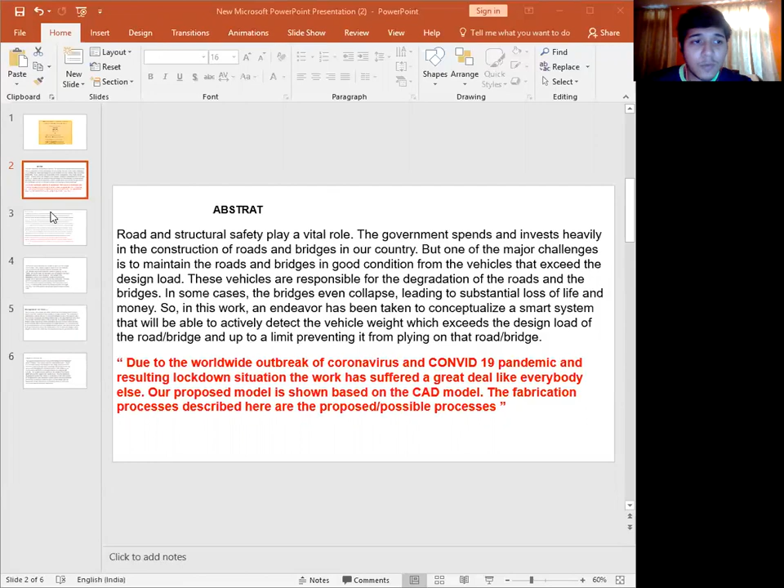Now moving on to the introduction. Due to the adverse effects of overweight vehicles, frequent measures are taken by the government for repairing structural components, requiring heavy investment. In some severe cases, bridges even collapse, leading to substantial loss of life and money, as well as paralyzing commute between connecting places.

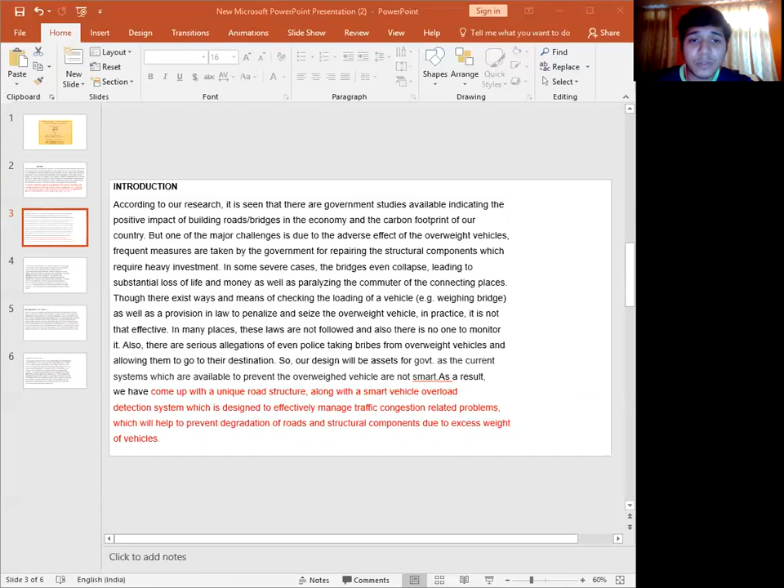Though there exist ways, means, and laws for checking vehicle loading, they are not that effective. Our design will be an asset for the government, as current systems to prevent overweight vehicles are not smart. So we have come up with a unique road structure along with a smart vehicle overload detection system, designed to effectively manage traffic congestion related problems and help prevent degradation of road structure components due to excess vehicle weight.

Now, moving to the motivation of the project. Our project will be government-based, as it is a capital intensive project that will act as an asset to the government to reduce the maintenance cost of roads and bridges. It will also give value to the smart city concept proposed by the government of India. Reducing maintenance costs through modern techniques is one way to save the economy.

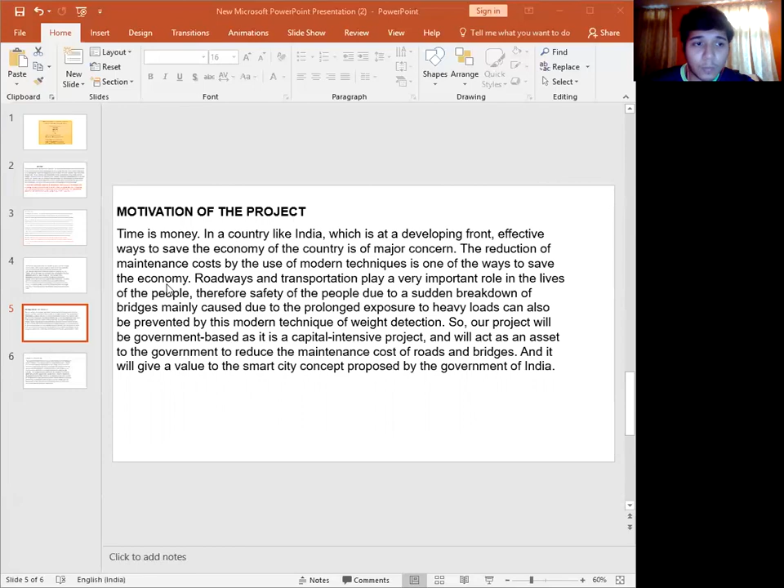Now here is the project overview. Our system will detect overweight vehicles using weight sensors. The weight sensors detect the vehicle's weight and send the signal to the Raspberry Pi. The Raspberry Pi then checks whether the vehicle is overloaded or not. If overloaded, the auto barricade system will be activated, preventing the overload vehicle from passing over the bridge. Our smart road design will help the overload vehicle easily turn and return without causing traffic congestion. Thank you.

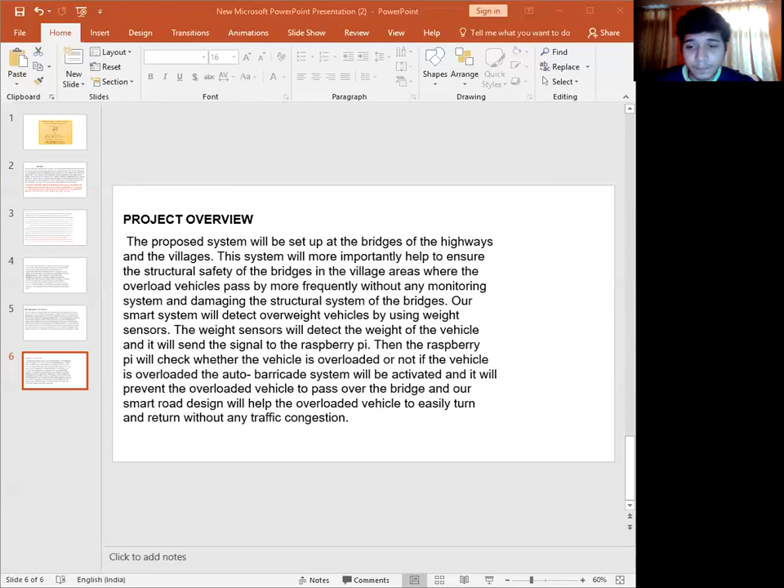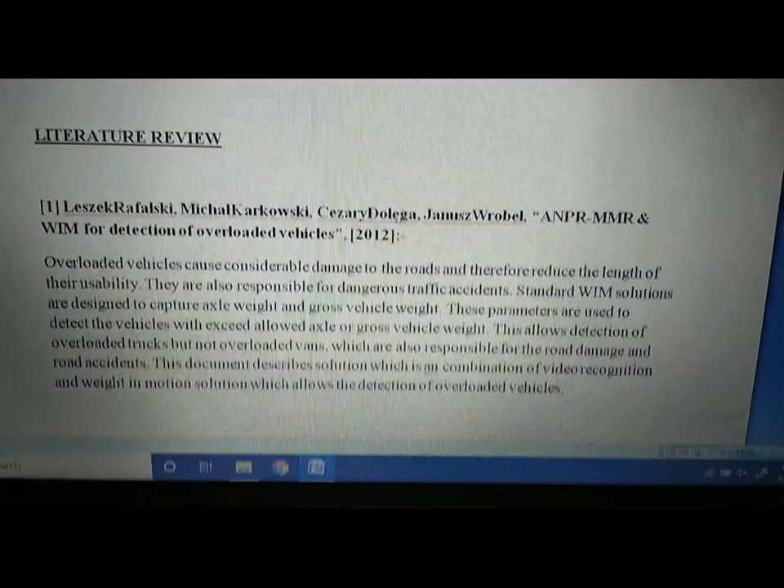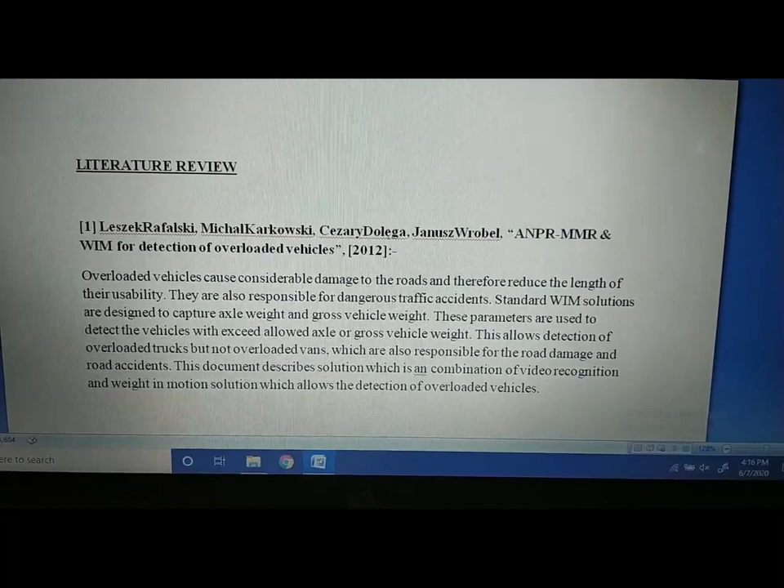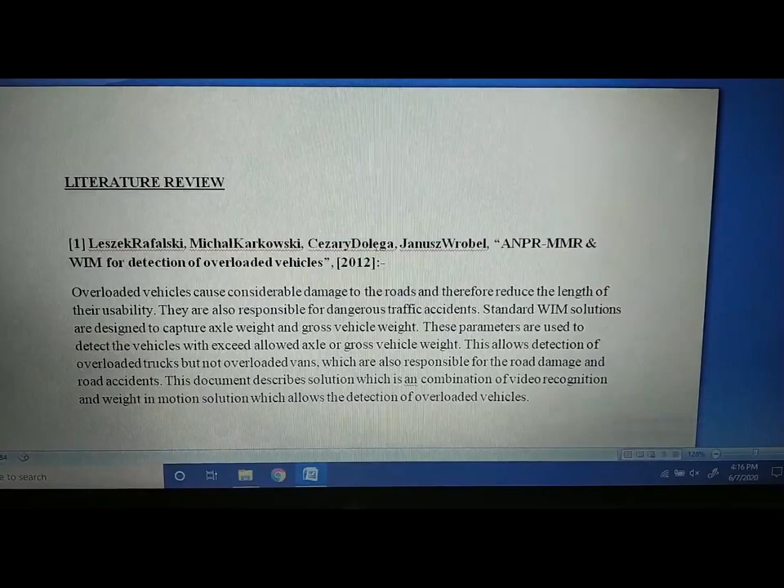For this project we have gone through lots of literature papers. I am going to explain some of the most important ones from which we got the concept of our project. The first one is on WIM (Weigh-In-Motion) for the detection of overweighted vehicles. This allows detection of overweighted trucks but not vans, which are also responsible for road damage and road accidents. This document describes a solution combining video recognition with weigh-in-motion, which allows detection of overweighted vehicles. So, we got the idea of how to detect overweighted vehicles from this paper.

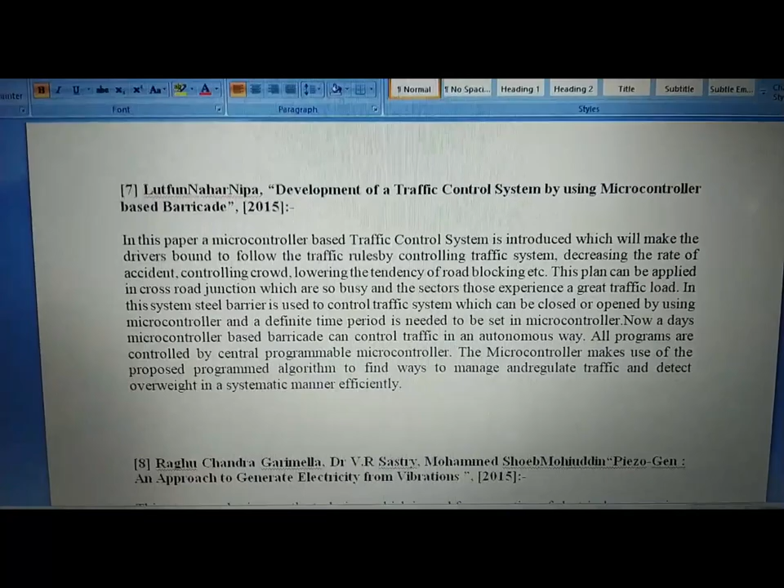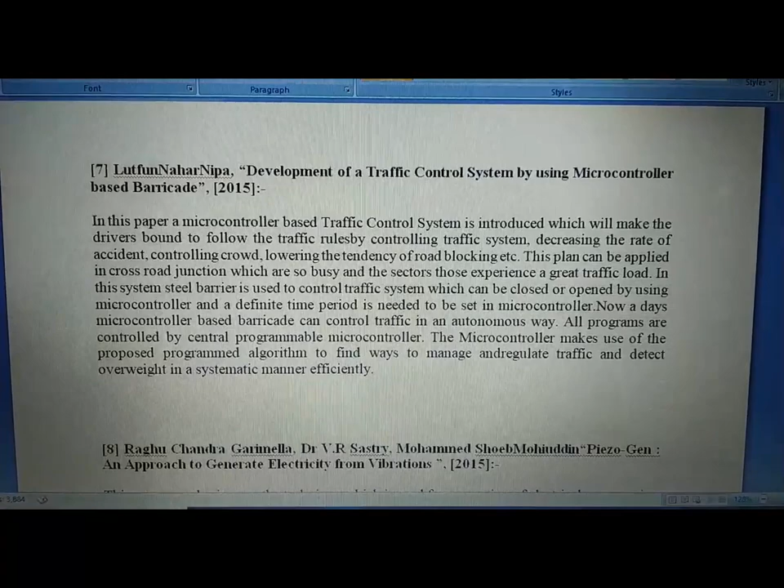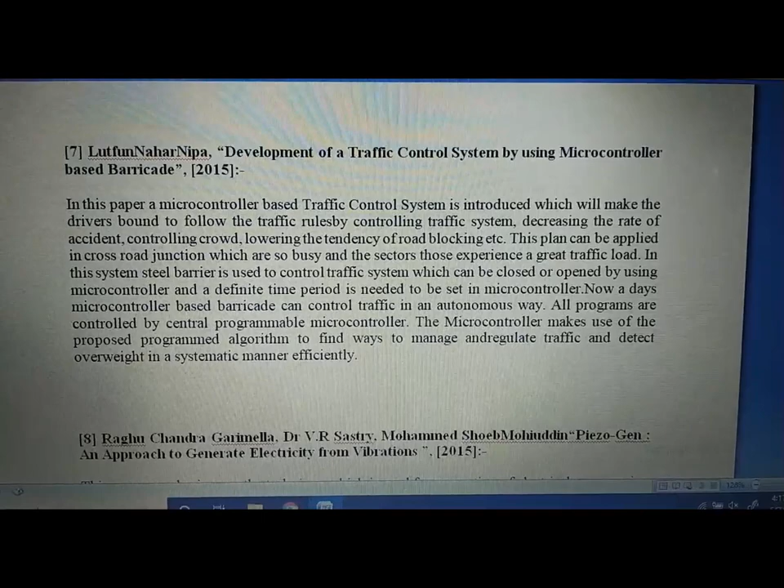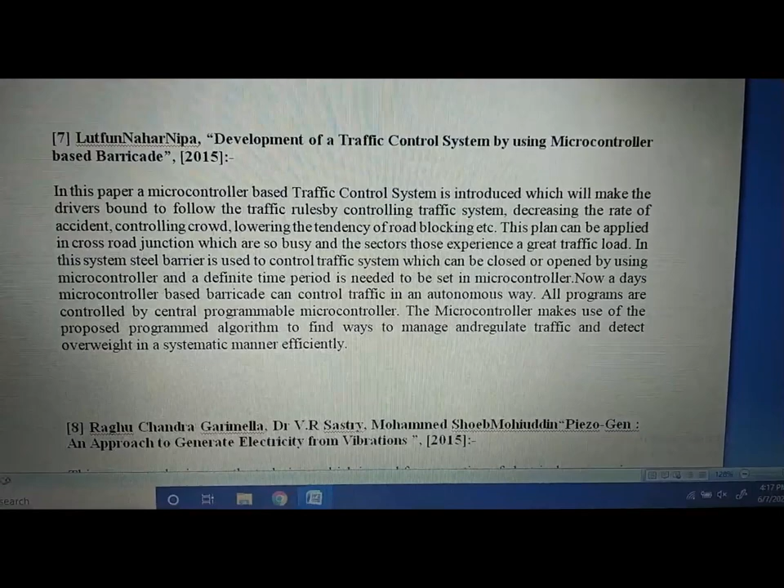The second one is most important, and we collected the idea of the automatic barricade system from this paper: development of a traffic control system using a microcontroller-based barricade system. They used microcontroller-based automatic systems in their barricades to control traffic, connected to a programmable microcontroller, making it autonomous. These traffic barricades operate in an autonomous way. So we got the idea for our automatic barricade system from this paper.

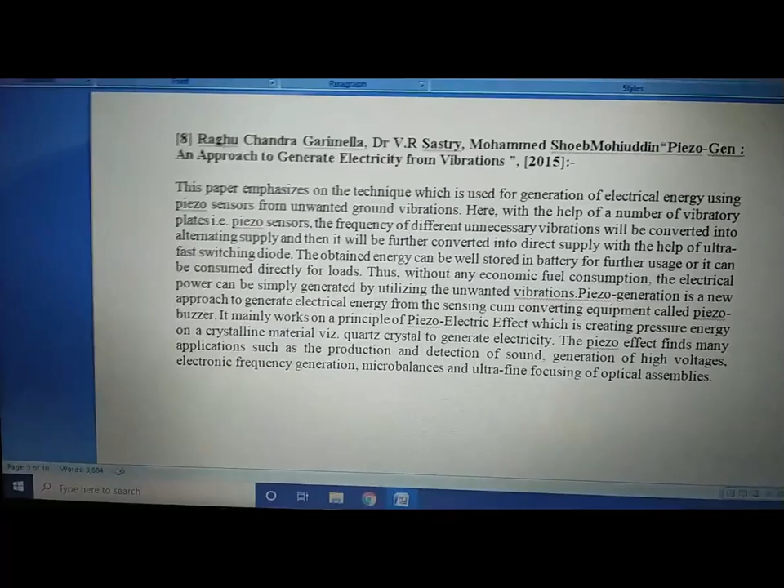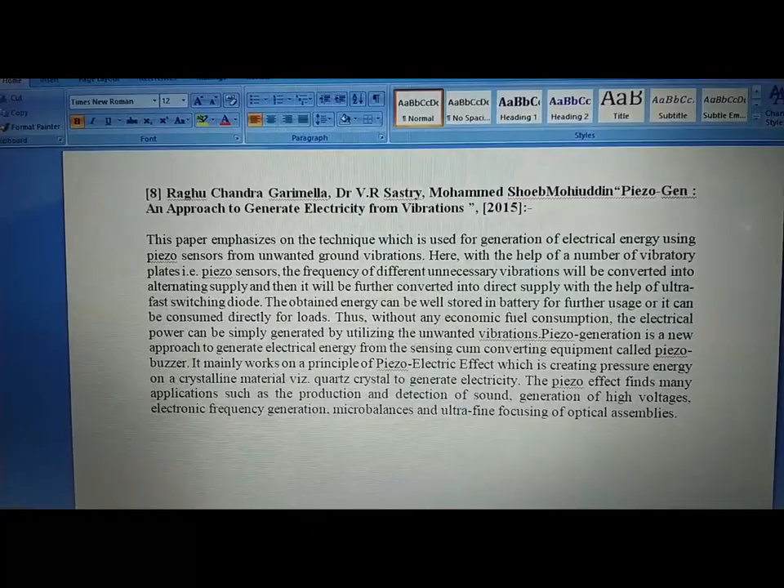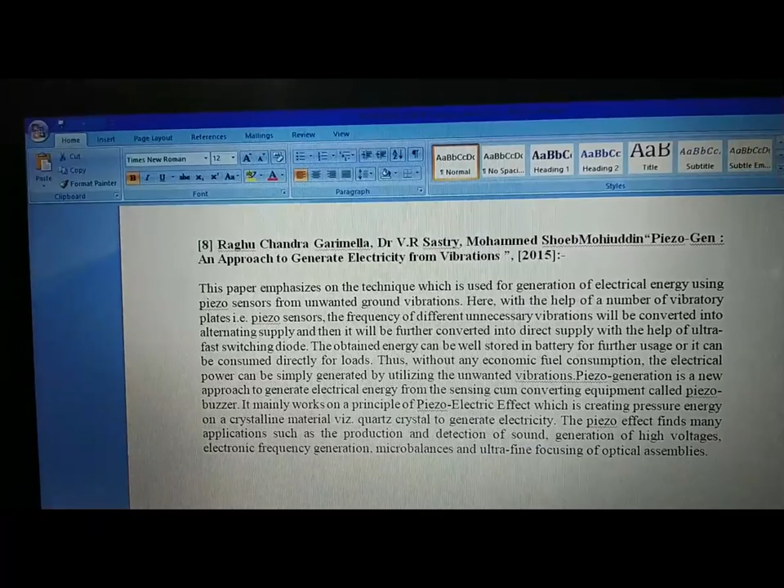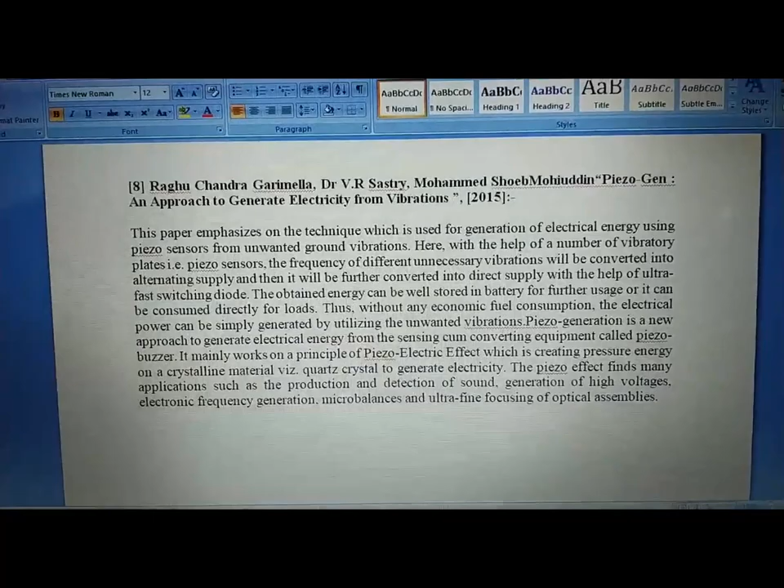The third paper gives us the idea of electrical energy generation from piezo sensors using unwanted ground vibrations. This paper, by Raghu Chandra Garimella, published in 2015, describes an approach to generate electricity from vibration using piezoelectric sensors. We got the idea of generating electricity this way from this paper.

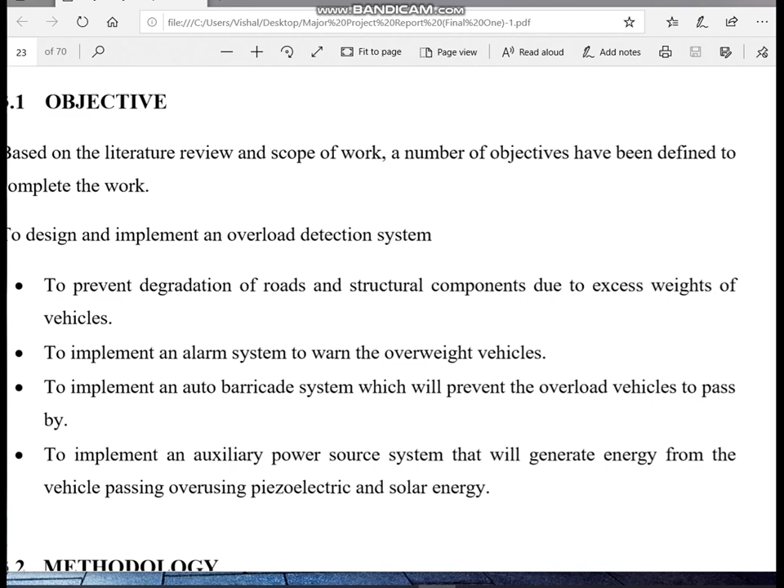There will also be attachments to the Raspberry Pi, like the load cell to measure the weight, and sensors to convert analog to digital signals like the HX711. There will also be an attachment for the barricade system, like the motor driver L293D, which will be connected to the Raspberry Pi to control the barricade system for opening and closing.

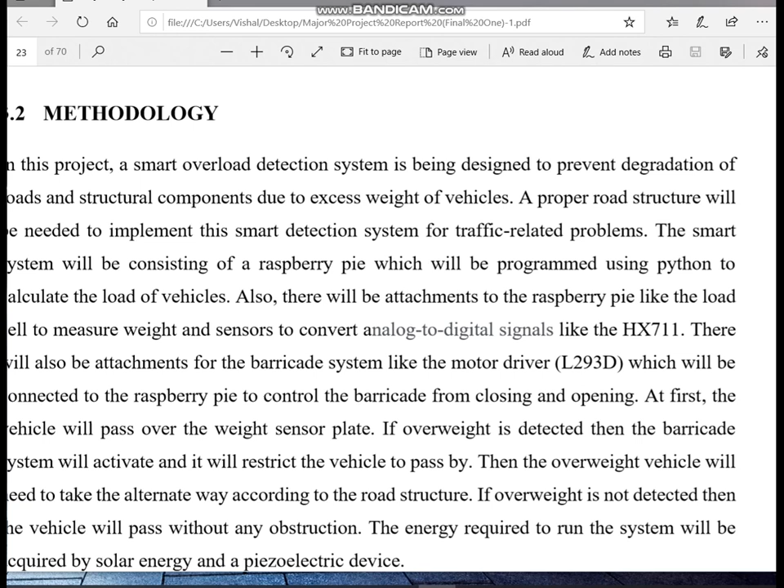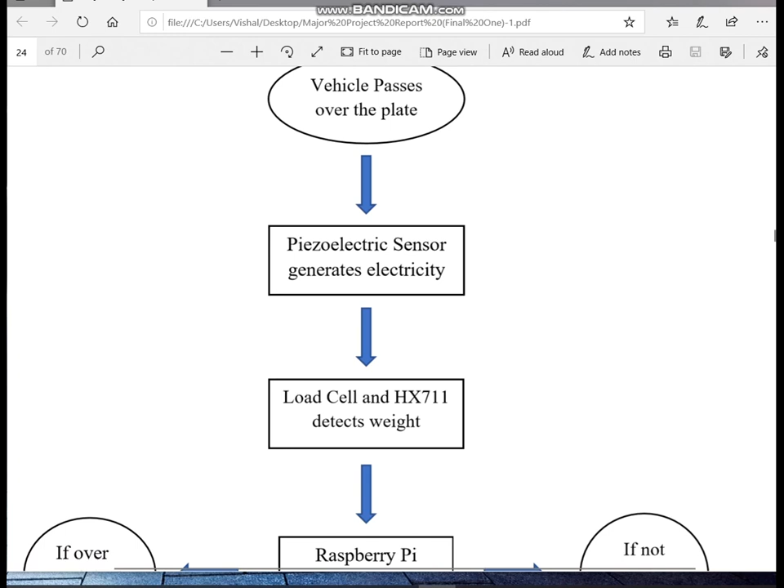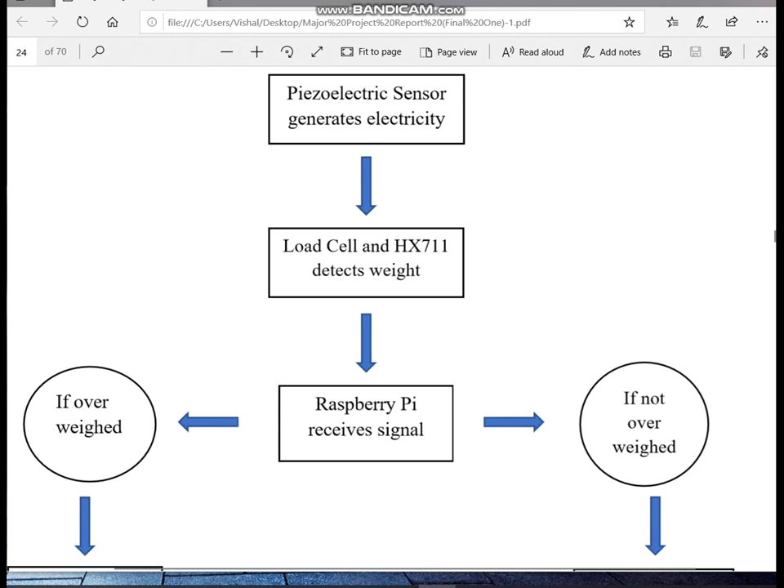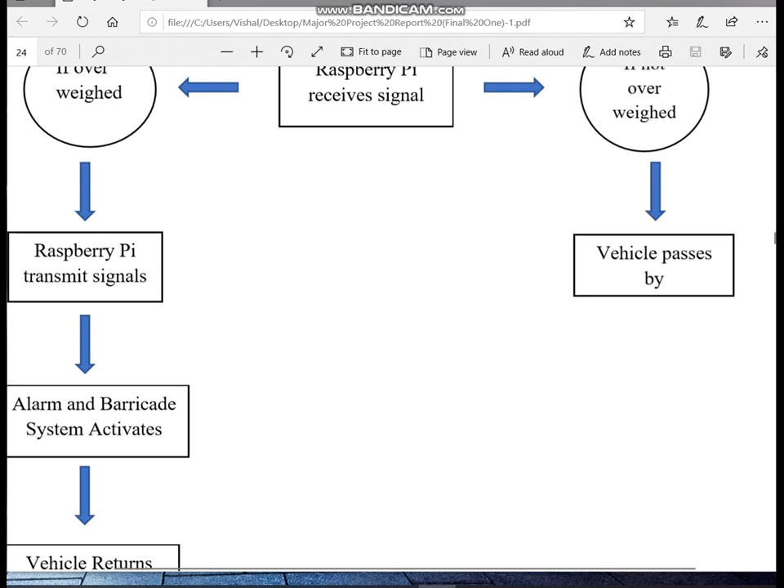If the vehicle passes over the plate, the piezoelectric sensors will generate electricity, and the load cell and HX711 will detect the weight and send the digital signal to the Raspberry Pi. If the vehicle is overweight, the Raspberry Pi transmits the signal, and an alarm and barricade system get activated, and the vehicle returns back with ease by the special road structure designed in our project. If the vehicle is not overweight, it passes by with ease.

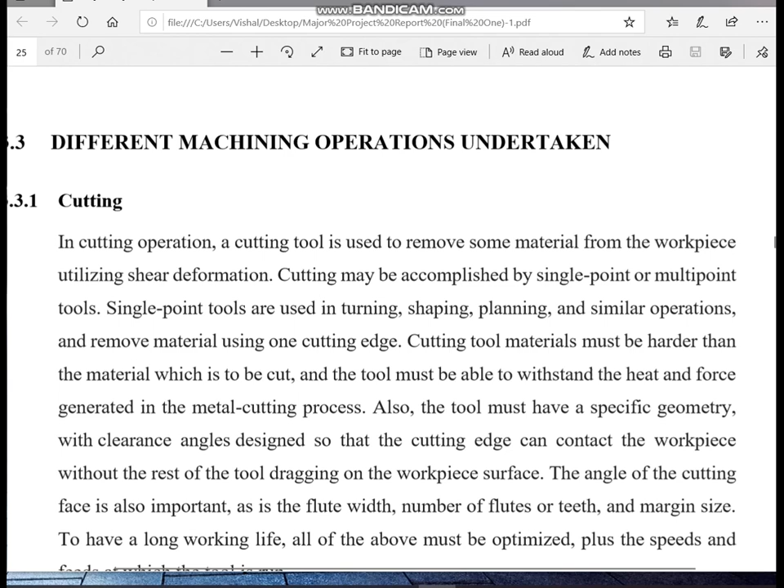These are the different machining operations undertaken. Number one is cutting: a cutting tool is used to remove material from the workpiece utilizing shear deformation. Next, we have drilling, which is a cutting process that uses a drill bit to cut a hole of circular cross section in solid materials. Next, we have grinding operations, which is an abrasive form of machining.

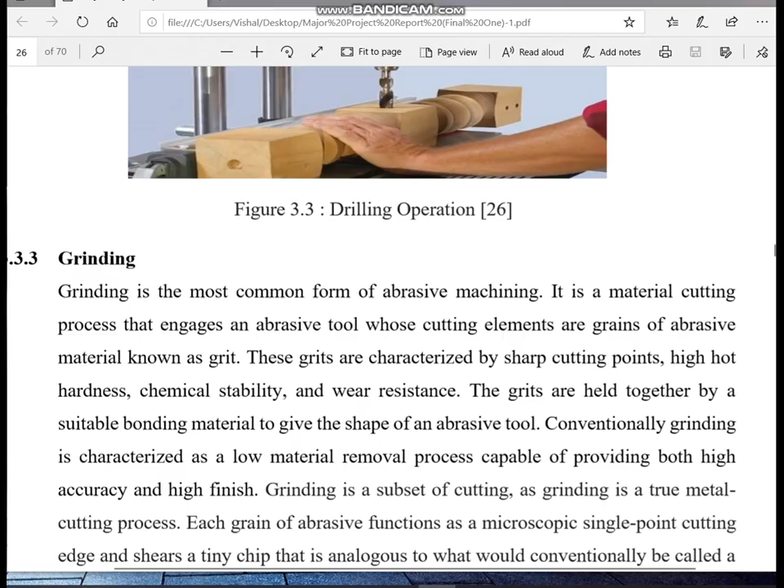Hello everyone, I am Bonjat Khaman and I will discuss the proposed model and road structure, along with an example of a bridge construction site. So first, to begin with the model design.

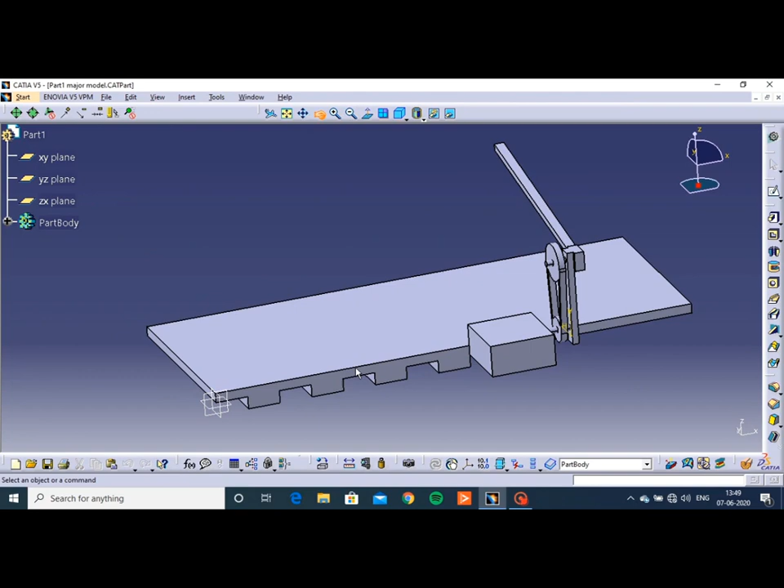This is the CATIA model of our project. These are the load cells. We have brought the equipment and made the connections, but since there is no workshop available, we are unable to do the fabrication. When the vehicle arrives, the load cell will take the reading and send it to the HX711, which will transmit the data to the Raspberry Pi in this box. There is a motor which will run the belt drive and then the barricade system.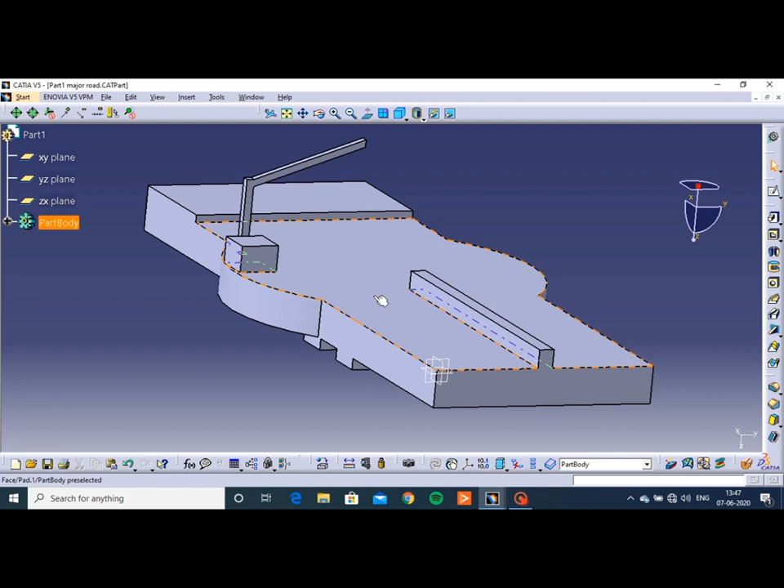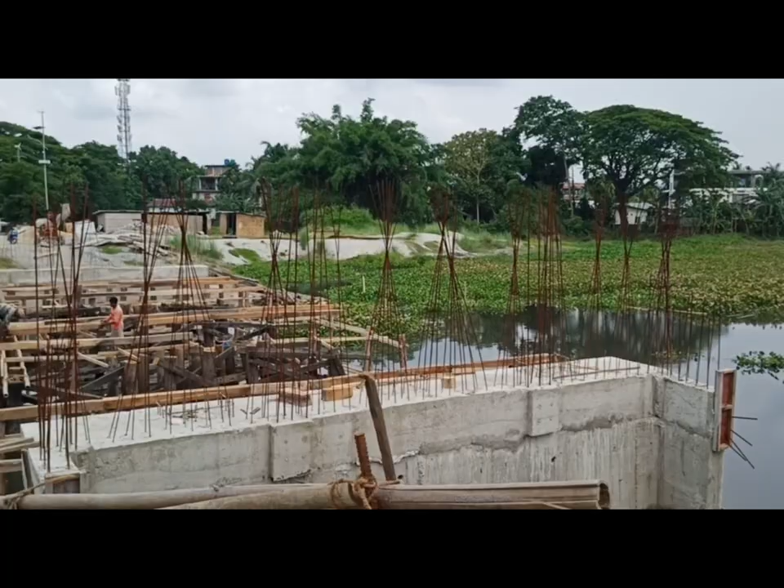Here at the bridge construction site, this is the alternative bridge for pedestrians and two-wheelers, but as the water level rises, they have to choose a different route. The wooden bridge was made for lightweight vehicles, but has to be reconstructed every year due to heavy soil-carrying trucks. Last year, they decided to make a concrete bridge, but due to COVID-19, no work has been done.

Our project idea would be very much applicable in this scenario to protect the newly made bridge, and this area would be very much suitable as per the proposed road structure.

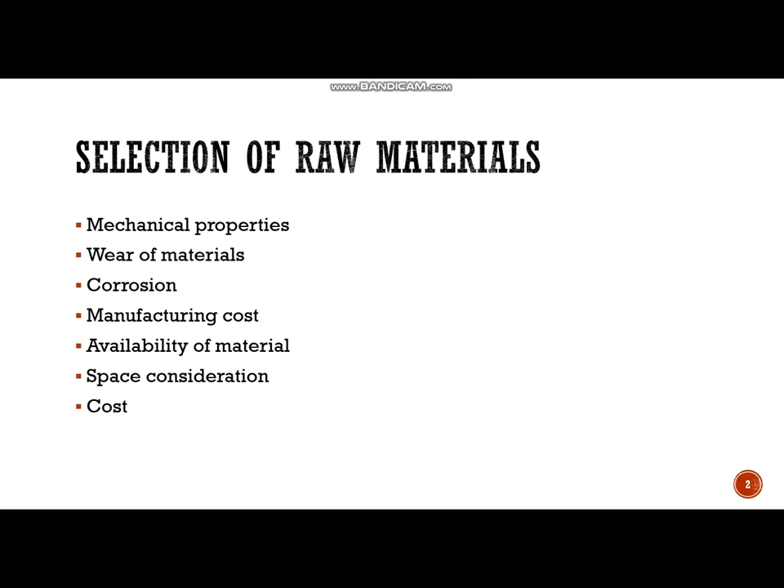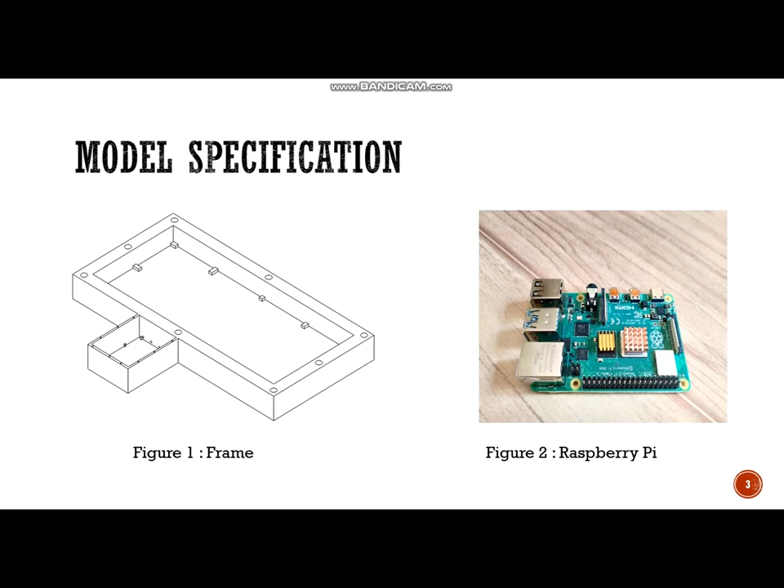A number of components have been used for the successful completion of the proposed proof of concept prototype. Here, some of the components of our prototype are shown: first the frame, then the Raspberry Pi, load cell, HX711 module, DC motor, and L293D module.

The various stages involved in fabrication of the proof of concept prototype are shown in this slide. The first step is construction of the frame. For the frame, a square channel pipe of mild steel is used as it is heavy and able to sustain different conditions. The necessary markings were done on the channel pipe considering the dimensions. Various operations involved are cutting, drilling, grinding, and arc welding.

The next step is placing all the equipment in the frame. All equipment was placed according to our design. The load cells, sensors, and piezoelectric sensors are placed below the aluminum metal sheet. Beside the metal sheet, a motor and a box-type structure are placed that contain the Raspberry Pi, HX711 module, and L293D module. The barricade system is placed next to the motor, and they are linked by a belt and pair of pulleys. The next step is connecting all the equipment in their respective order.

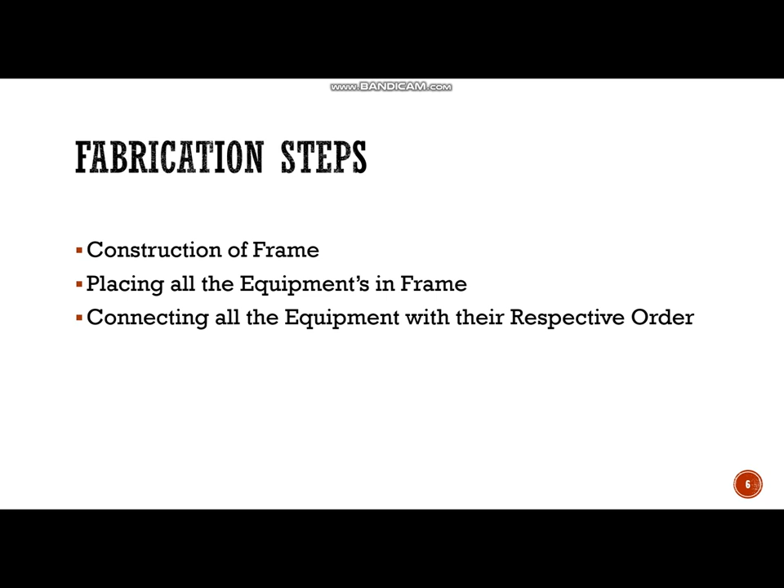The load cell is connected with the HX711 module by connecting the red, black, white, and green wires of the load cell with the E+, E-, A-, and A+ wires of the HX711 module. The DC motor is connected to the output ports, M1 and M2, of the L293D module.

The Raspberry Pi contains a row of 40 pins known as GPIO pins, that is, general purpose input-output, which help in receiving and transmitting signals to various devices. To make the connection proper and error-free, we extended the Raspberry Pi's GPIO connection ports to a breadboard with the help of a 40-pin GPIO extension board and a 40-pin GPIO gray cable.

The wires from the port, ground, DT, SCK, and supply of the HX711 module are connected to ground, GPIO port 27, GPIO port 17, and the 5-volt port of the Raspberry Pi. Similarly, the wires from the 5-volt, ground, input 1, and input 2 ports of the L293D module are connected to 5-volt, ground, GPIO port 12, and GPIO port 16 of the Raspberry Pi.

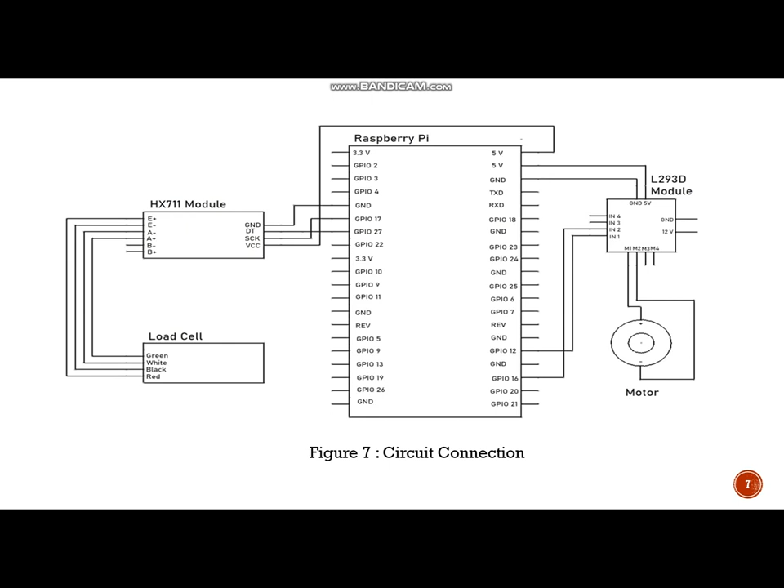After connecting all the equipment, a Python program will be required to successfully run the smart system, which is shown in the coming slides. In real-life application, if the government finds this project suitable, then it will implement it in collaboration.

For that, some of the potential equipment which can be implemented are shown. For weight detection purpose, a WIM system can be implemented, that is, weigh-in-motion sensors. And for the barricade system, an AGH7 horizontal automatic barrier can also be implemented.

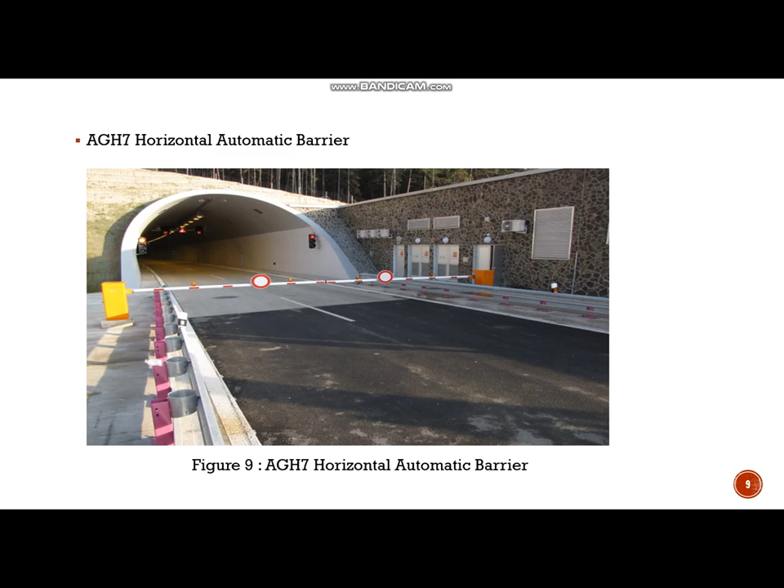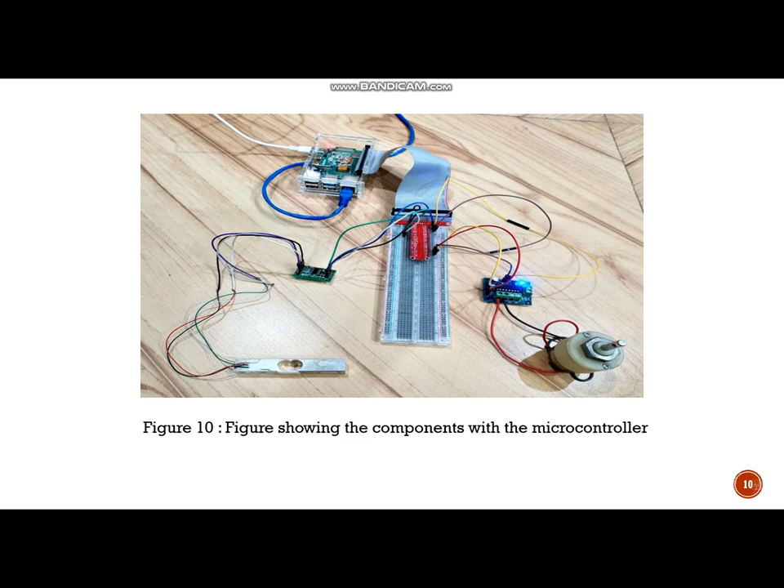Next steps to be followed are constructing the frame with proper dimensions and machining operations, placing all the equipments in the frame in proper order, combining more than one load cell for weight detection, which could not be completed due to the pandemic situation of COVID-19.

Next part is programming the smart system. To make our system smart, to detect the weight failure from the HX711 module and load cell, and to run the DC motor accordingly with the help of L293D module, we have to incorporate logic and smartness to the system. For this, we are using a Raspberry Pi microcontroller which has the capability to control all the equipment simultaneously via its GPIO port. To work with a Raspberry Pi, we need to program the system according to our needs, and for enabling this capacity we need to program the system.

First of all, we have included library for the GPIO pins of the Raspberry Pi and also defined the pins for HX711 module and DC motor. Here, as you can see, the port DT and SCK of the HX711 module is defined to GPIO port 27 and 17 of the Raspberry Pi. Similarly, input 1 and input 2 port of the L293D module is defined to 12 and 16 GPIO port of the Raspberry Pi.

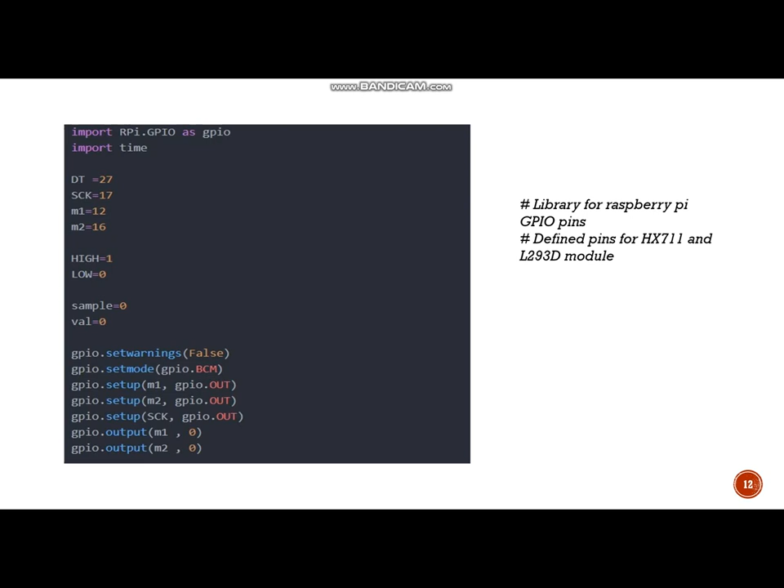Here, we are referring to the pins by the Broadcom SoC channel number. Next, we have given a library for reading the data from the HX711 module.